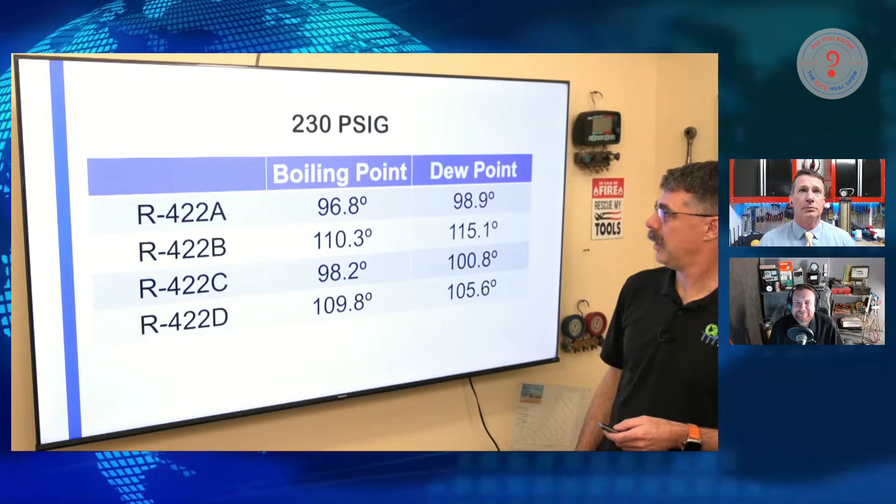At 230 psig, A, 96.8 to 98.9. B, 110 to 115. 98.2 to 100.8, 109.8 to 105.6. And I reversed those two on the bottom as I'm sitting here looking at it. This is what happens when you're trying to do too many things at once and you make a slide and you reverse two numbers. We can fix that. I'll do that later.

But my point is, if I said, okay, I got R422A, well, I don't have R422A on my truck, but that's what's in the system. Oh, wait a minute, I got some R422D in my truck. Let's put some R422D in there. It's close enough, right? It's the same components. Why just change that blend? Now I'm going to be somewhere between these points. Something that's not going to reference at all.

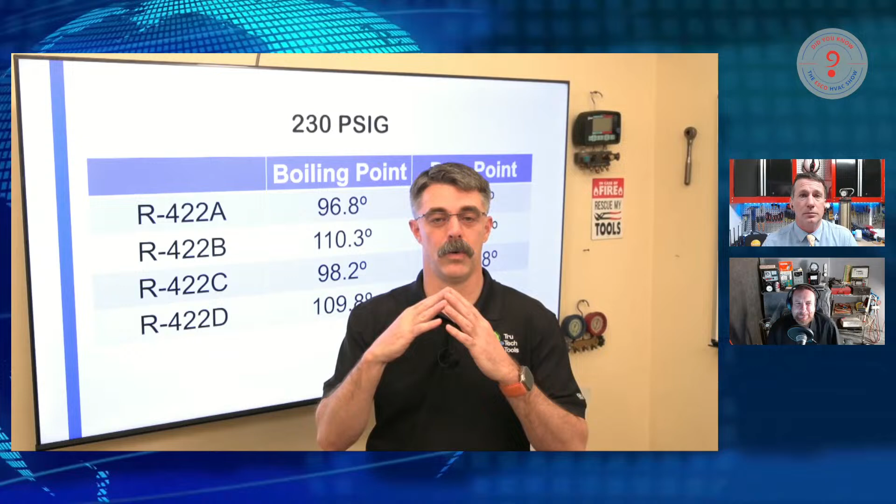Yeah. And this goes back to our gas laws that we teach in school a lot of times, is that those are based on ideal gases, and ideal gases are a theoretical gas. Anytime we start combining components, the pressures do add, but they're not perfectly stacked on top of each other. They mix somewhat.

So now we have these things in between here. The distance between these two is called glide. Okay, and this is where we talk about glide. But this is an evolution. This is a new thing we didn't ever have to deal with in single component refrigerants. Right. And now we have something in between these two called midpoint.

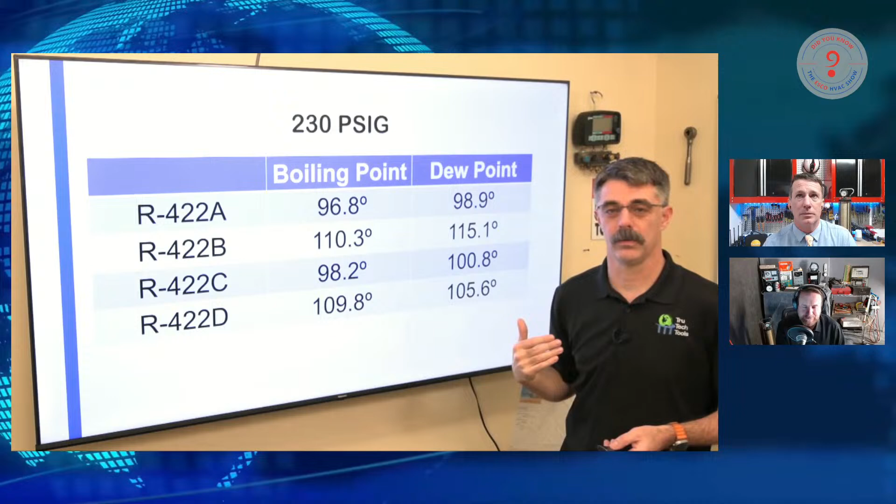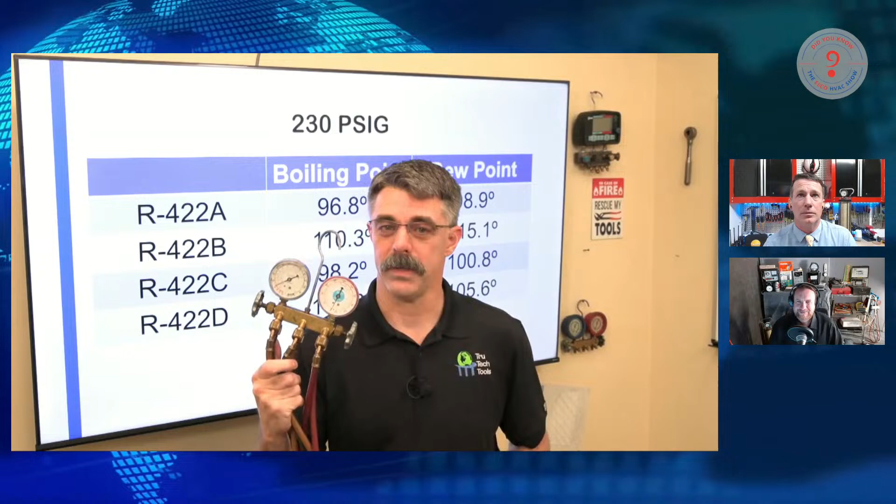Well, okay, now we're starting to get a lot of stuff here. And we need this PT chart to do what? Measure superheat and subcooling? Yeah, absolutely. See how far into a gas we are, see how far into a liquid we are. Well, we're starting to get a lot of steps in here. And with single component refrigerant, it was pretty easy. We'd have a set of gauges. We might look at a PT chart based on the pressure we see on here.

Okay. And we could make a really quick decision. But now we got to look at a pressure. We're going to measure a temperature. We got to figure out which one of these to use. If we want to know the average coil temperature, we have to calculate the midpoint in between, which in a condenser, it's literally halfway between these 2 points. But in an evaporator, because it has a metering device at the beginning of it, it's a different calculation for your midpoint temperature.

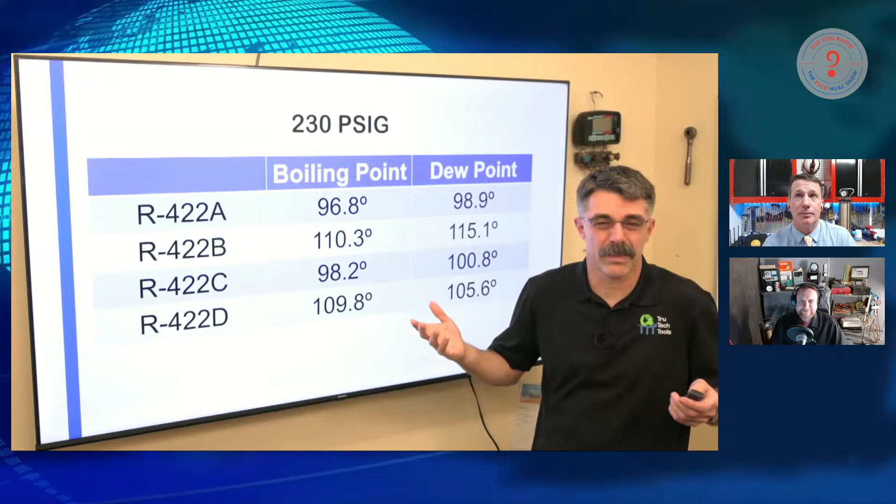All right. I'm not going to go into the math. No, 'cause we're here talking about the evolution. Right, we're getting there. Hang in here with us, right? So we're getting some of the math, but then we're going to understand why it becomes so much more critical using proper tools of today.

I have a math tool right here. There we go. I punch some things into this. Guess what? It gives me the midpoint. Absolutely. I use the right app, it gives me the midpoint. I don't have to deal with it. I don't have to remember all the mathematical formulas. I use tools to my advantage to be more efficient.

Yeah, absolutely. I just had this conversation yesterday when we were talking about doing calculations, and it was exactly on this type of scenario. It's not about teaching that technology is the replacement of our fundamentals. It's showing that technology makes things a little bit faster, just like with my typewriter to my PC analogy. It's not that I'm teaching someone a new way to do things. I'm just showing them faster ways to do the things that we have been teaching them.

Right. And with a typewriter, you might be able to type at the same speed on a computer, but dissemination after you type it up, sharing it, saving it, editing it. Yeah. If you want to edit that, you either have to type over what you already typed, or if you really want to change something and completely reformat it, you got to type it all over again. Yeah, exactly. On a computer, it's a couple button pushes, it reformats it, you throw a picture in there. Whew, that was fast. That's right. It's evolution of technology.

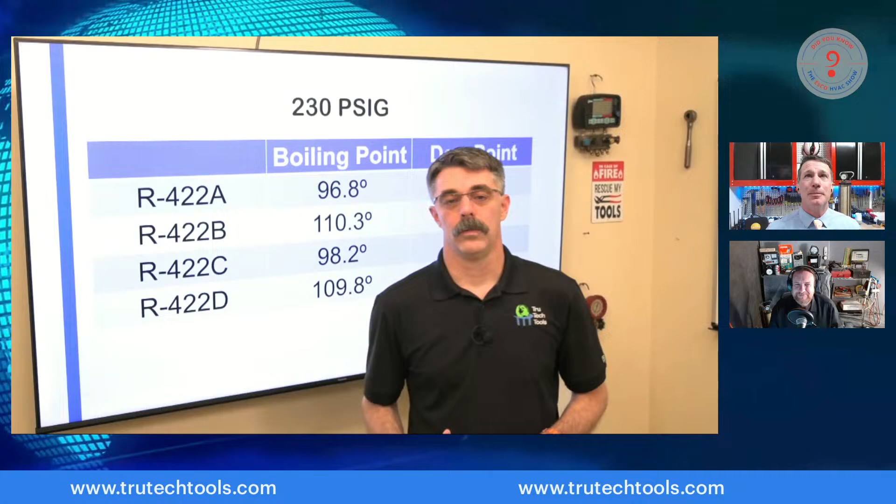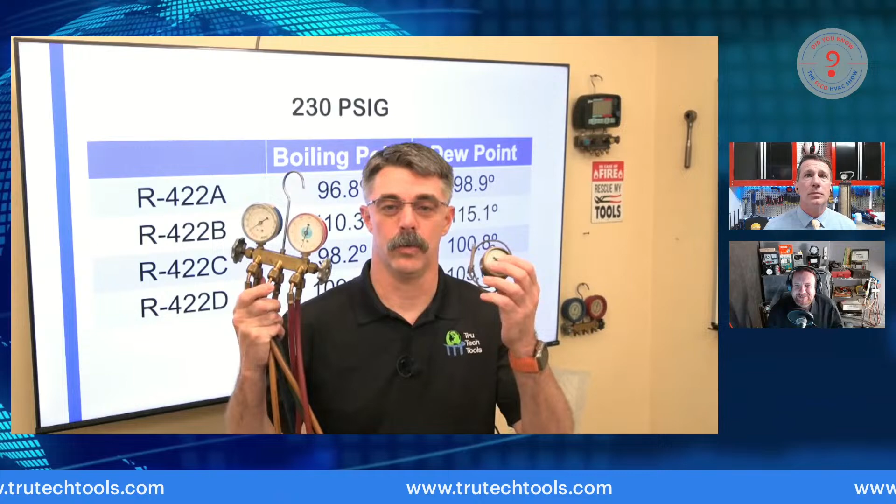So, this kind of thing here, right? Technology makes this a lot easier, because if I went from, say, these two tools, this is an old Serviceman. I had to look and remember the name of it. Serviceman superheat gauge. Well, an analog. Well, we replaced these with, we'll say, digital tools.

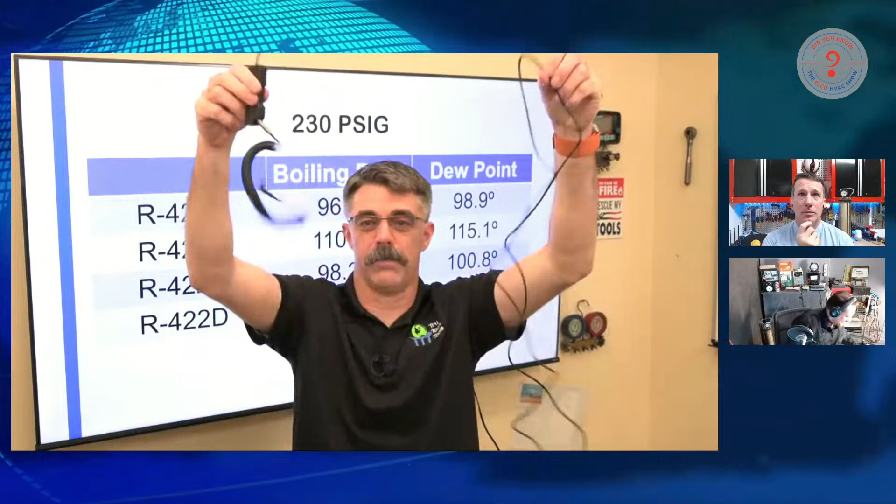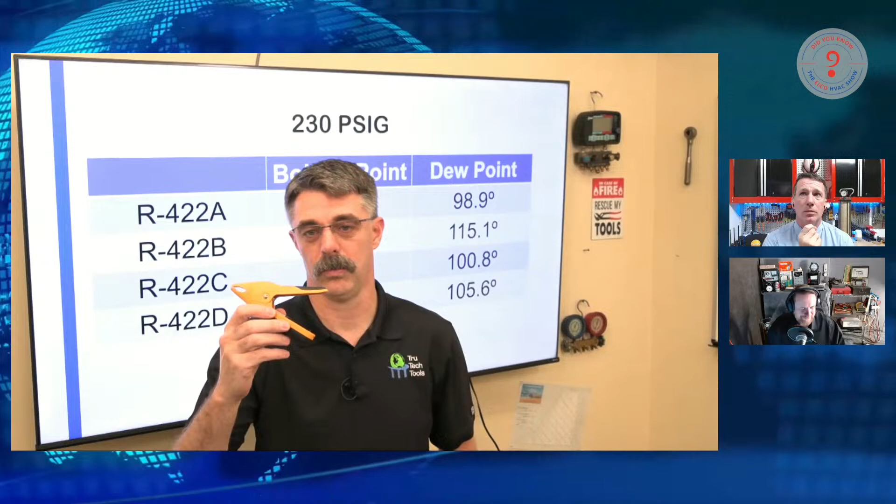Okay, I love my Cooper thermometers. They're fantastic gauges. I could monitor 3 temperatures at a time, but then I got to deal with this stuff everywhere. Absolutely. Right, and that takes more time to connect up and hook up and unhook and put away and take care of. And the evolution of that is now we go to completely wireless temperature sensors that we can clip onto a line or put into a duct and measure things.

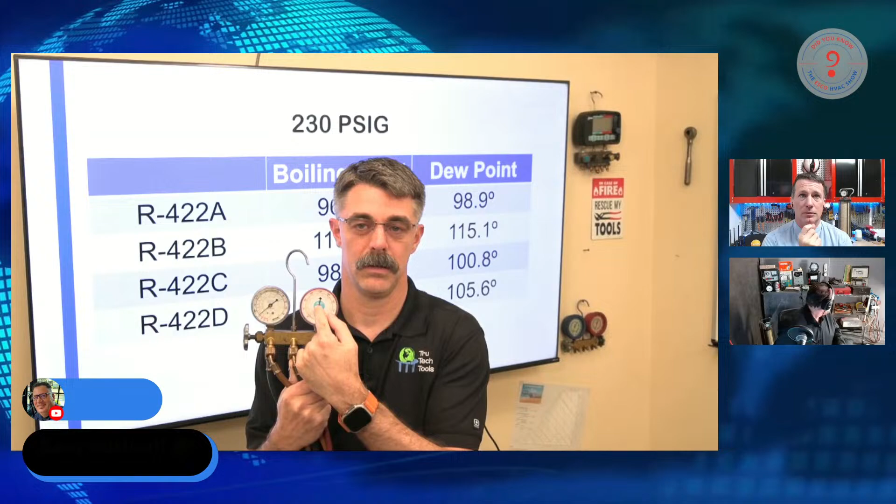So what about accuracy? Well, accuracy is a big thing. Accuracy, going from something like this. So this gauge would be in the center half or the center third, depending on how the gauge is rated, it would be 2% of full scale on that gauge, versus the first and last third, or the first quarter and last quarter, again, depending on how it's rated. Those would typically be plus or minus 3% of full scale.

Okay. Or sometimes they do plus or minus 3% of the reading or full scale, depending on how the gauge is rated. And there's a lot of different ways that the manufacturers will rate them. Then when we start getting into digital things, well, the evolution really was from manifolds. We went to things like this DigiCool, and this was really one of the first robust, reliable digital gauges out there.

Oh, look at Ty down there. What is that? What is that, Ty? It's a Charge Master. Oh, wow. I don't even know as I've ever seen one of those. Yeah. Cool. I'm glad you brought that up. I haven't seen one of them in forever.

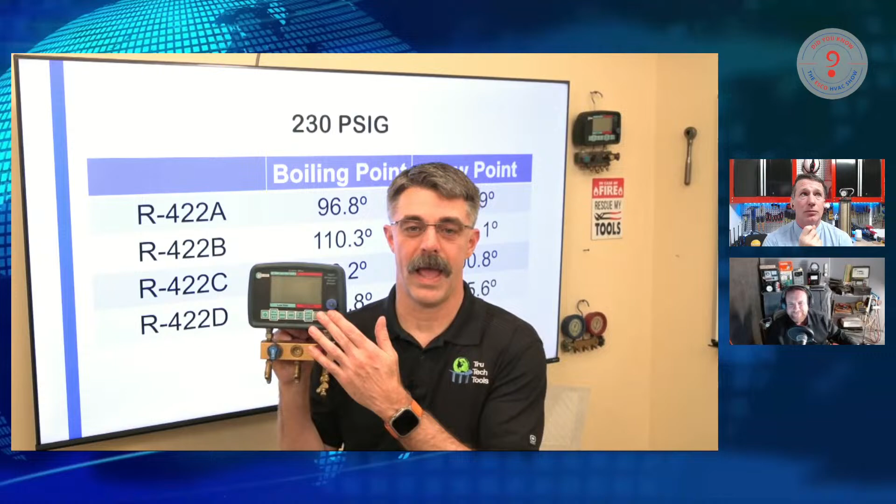Man, that's neat. So we're back to using mechanical pressure readings. We're using mechanical temperature readings. Yeah. So, the first evolution of these didn't even have a temperature sensor on it. It was just literally a pressure and a digital PT chart built in here, so that it would tell you your dew point, your bubble point on the refrigerant. It would take the pressure and immediately tell you that out of it. Right? So that was an evolutionary step.

And then the next generation came out with a single temperature probe on it, and you would switch it back and forth between the lines depending on what you wanted to charge with. And then the marketplace said, hey, guess what? We want 2 temperature probes so we can look at superheat and subcooling at the same time. Simultaneously. And we don't have to wait for that temperature probe to stabilize if we need to switch between 2 lines. So then we had 2 temperature probes coming out of it.

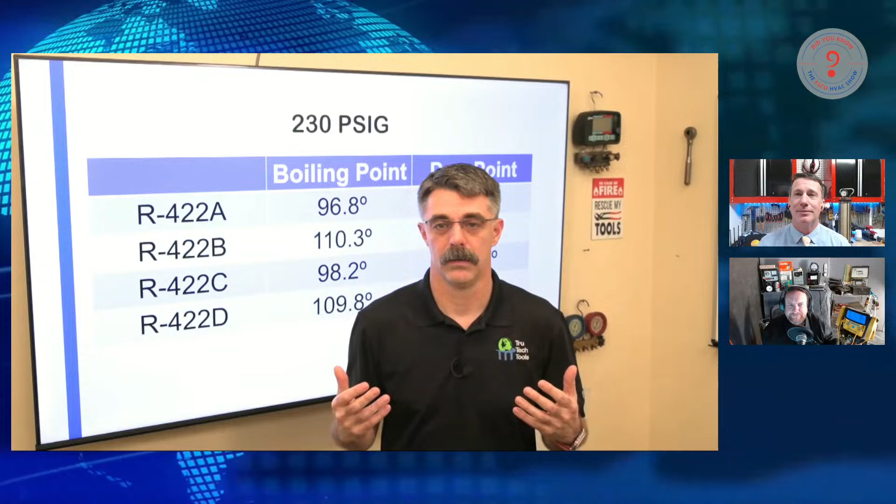And then it evolved because the early generations of this would only show you superheat or subcooling, not both simultaneously. So it evolved again to be able to show both simultaneously. And all of this has happened in my time in the career, and it's evolved so fast that this company's out of business now. Wow. Because they were a small company and they couldn't keep up with the marketplace. But that was an evolution. It was people asking for stuff. So that's why there were so many changes to that tool.

And now we're into smart probes. This loses less refrigerant. I don't have a bunch of refrigerant sitting in my hoses that I have to deal with. Yeah. I don't have to deal with wires or a lot of hoses with these things.

Sure. I see Ty's brain going over there. Ty's got all kinds of stuff there. Yeah, all kinds of probes there.

And we've had short, stubby analog gauges for quite some time. A lot of people would only use them on critically charged systems.

There you go. Ty's got all the tools. Apparently, I thought I had a lot of tools here. Ty's got me beat.

So we start with mechanical pressure. We start with mechanical temperature. Form a calculation for superheat. We move to a mechanical pressure, a mechanical temperature, form our subcooling. As we're progressing, we're adding to another, we're getting tighter on our tolerances, and now let's get into some of our more critical temperature pressure readings. So now we start matching up a phone and probes, or it can be a manifold with Bluetooth, but the probes are nice because they are in a lot of ways faster. They're lighter, they're easier to carry around, they're smaller.

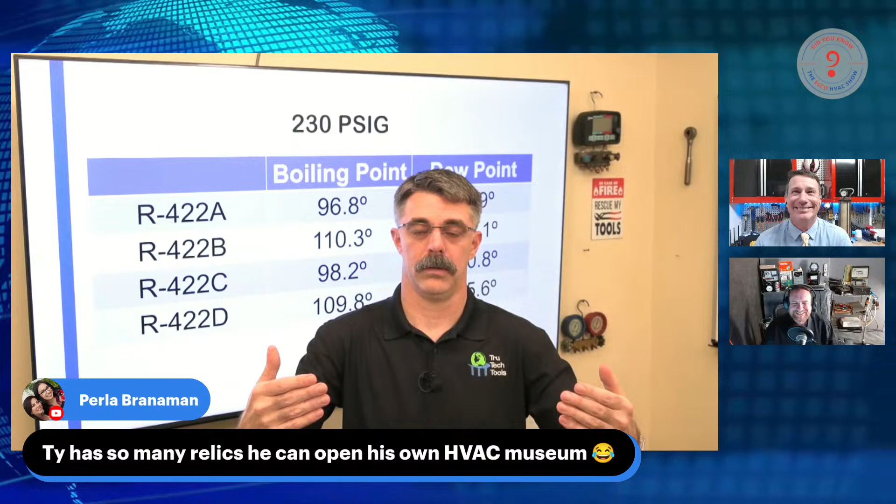I was lucky enough to be actually watching and had a small amount of input even into the early days of the iManifold and what's now turned into MeasureQuick over time. Yeah, absolutely. I've got my iManifold over here. I actually won it my first year at the conference, by the way. Nice. Yeah, I still got one sitting out there myself.

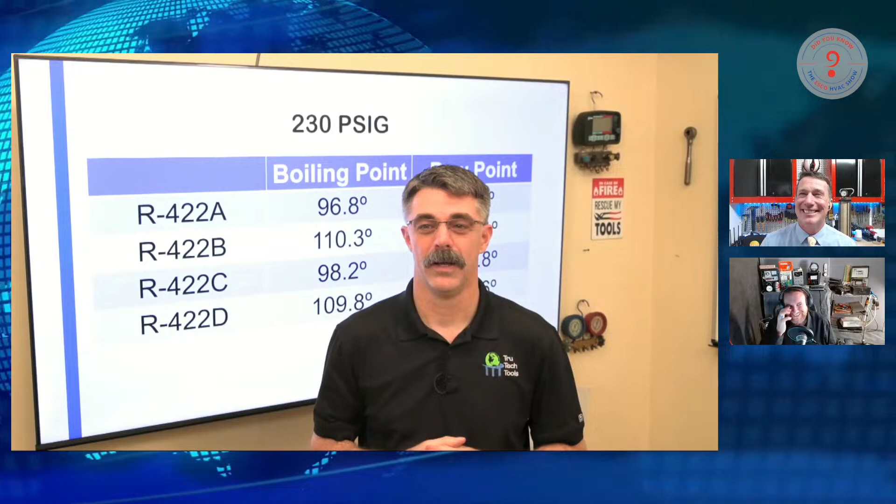Sure. But I was actually, like I said, lucky enough to watch that forum where all that idea kind of generated from, and get to see the input that went into that. And that came from a group of technicians wanting more information and wanting to automate that information, because guess what? They were tired of doing math and not knowing all this stuff. Because you realize that when you look at a refrigerant system or a system in general, it's a system, it's dynamic, it's constantly changing and fluctuating a little bit.

Absolutely. They wanted to be able to see all that information gathered in one central location, rather than having to look at 5 or 6 or 7 different gauges and things like that. Well, by the time that I started out using checklists, and we had very extensive checklists, by the time you got the information from your instruments, converted it and put it into the right spots, and then did the math, by the time you get this number and then you got this number, the system changed.

And so by the time you got all of your readings, there was a time change between your numbers. So there was a huge accuracy loss, not only in the time it takes to write everything out, but the time change even if you did it right. So now when we have things like MeasureQuick, it's amazing because I can just hook up my probes, get changes, and instantly see. I don't have trouble with numbers and letters, really.

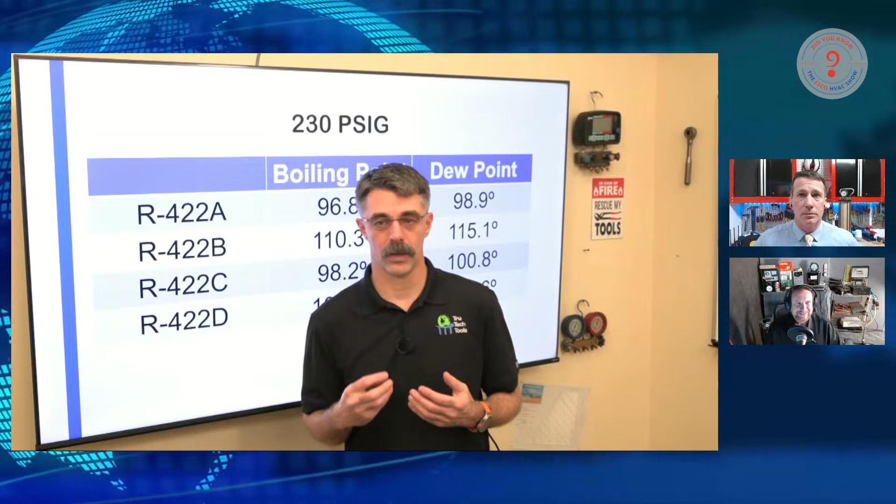And it allows us to do it more accurately. The equipment is demanding it. Right? If you look at the manufacturer specifications on equipment and what they're desiring us to dial that in to get the equipment performance that the equipment's even rated at, we have to have better instrumentation. We have to have the ability to take that information in, and it's honestly a lot more than we can process in the human brain in a very, very short period of time.

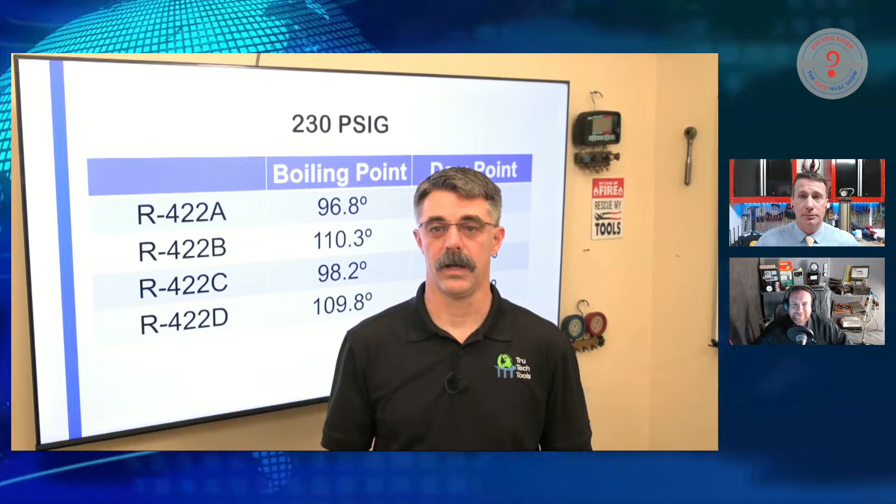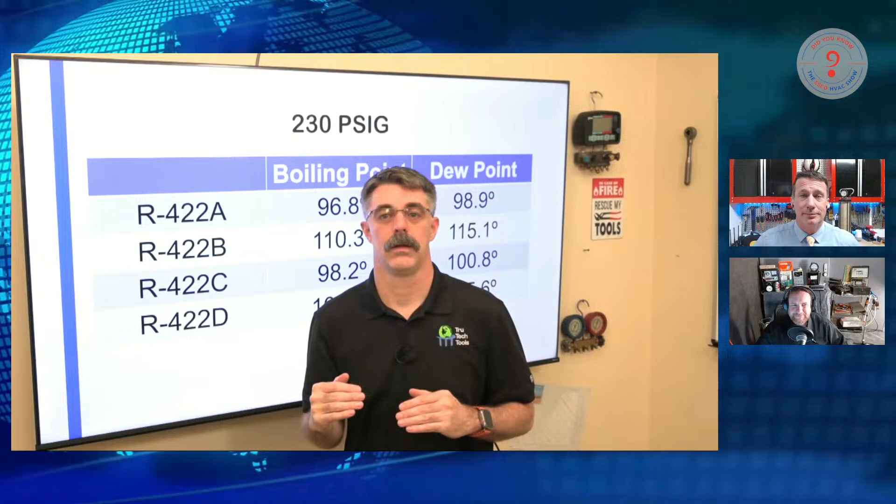So we need to get that information because we need to take the output of that information. Our job really as the human is to interface between the information that our instruments give us and our customers. We are the interface between that. We need to get that raw data in a way that we can understand it, and then we flip that data into a way that our customer can understand it and make an educated decision.

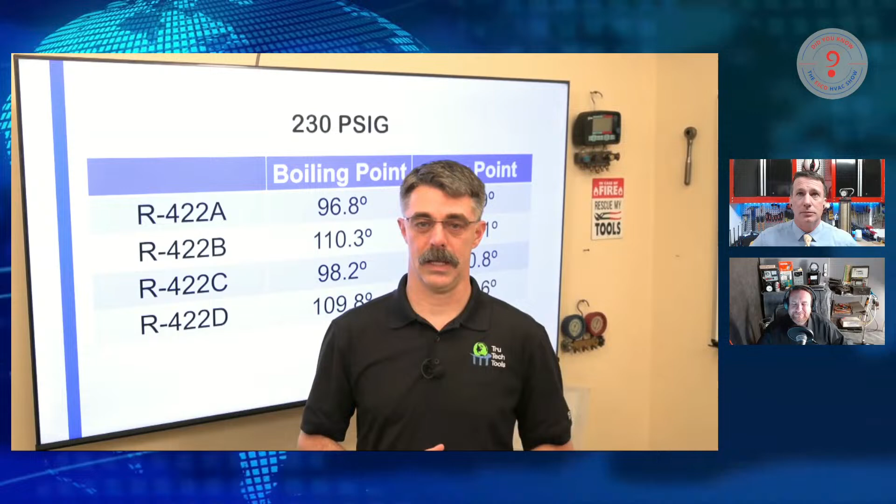If we talk about the evolution of tools and evolutions of industries, when was the last time that you went to a doctor and he pulled out a glass thermometer to check temperature, right? It kind of comes back to the same technologies we are looking at. We are now moving into being able to gather that input faster so we can do the calculations faster so that we can have an output that is faster than we've been able to do in the past. Well, and we're also able to gather more information than we ever have before.

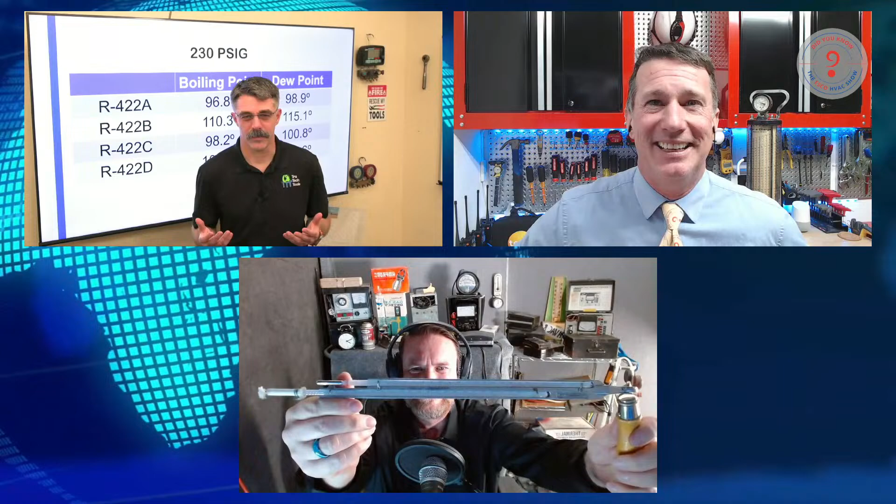Look at that. Prime example. Good call, Ty. Is that a psychrometer? That is a sling psychrometer, isn't it? Right. So if we talk about measuring temperature and humidity and getting wet bulb and dry bulb in the past, it would take time to get that calculation, not including the time it took to actually wet the wick to get a proper measurement. Where now we can do that in seconds with digital tooling.

Ty, how big of a hole do you have to put in a ductwork to stick your arm in and sling that thing around inside of a duct? Oh, I use the evolution to the newer one. There you go. Oh, okay, good. You got the newer version there. Nice, nice. I'm glad to see that.

Nunchucks. All right, now I want to see Eugene at the conference walking around twirling twin sling psychrometers. Don't say that. I'll do it. I'll get them ordered. I still got days left. Dangerous.

So this is another evolution here, right? How many people in the chat know what that is? And my boss Bill's in the chat. He's not allowed to answer because I know he knows what that is. I am stuck. Is that a mechanical pitot tube? Well, wait. No. You got me stumped. So that is a Fyrite bottle. Oh. Okay. That is a combustion analyzer. Yeah. That's a very, very early combustion analyzer.

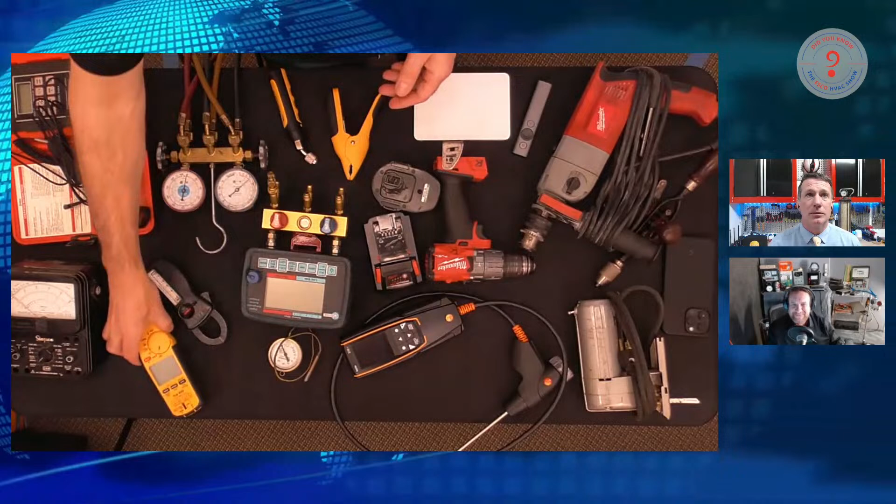No. Now we have this. It's got a clamp in it, does all that stuff. It does way more than those 2 original instruments put together in a much smaller and lighter weight package. So tools have been evolving for a long time. I suspect they're going to continue to evolve, just as the rest of the trade is.

So when we start seeing an evolution of tools and we know that we're moving into faster, lighter products, what do you see as the primary products going into 2024 that we should be focusing on for the classrooms? Well, I think we should be focusing on anything that is really starting to become more mainstream. Probes are a big one. I see a lot of people that are really afraid of refrigerant probes. And they are different to charge with. That's one of the biggest complaints I hear: how do you charge with that?

Okay. You screw it into a T. There's a little T that screws in here. And then you run a hose over to your refrigerant tank with a ball valve in it. That's it. That's how you charge with it. And some brands of probes actually have a charging port on them where you can screw a charging hose directly onto that port, already built into it. There's a lot of different brands.

Oh man, Ty's got the camera out there too. Holy cow! Look at that.